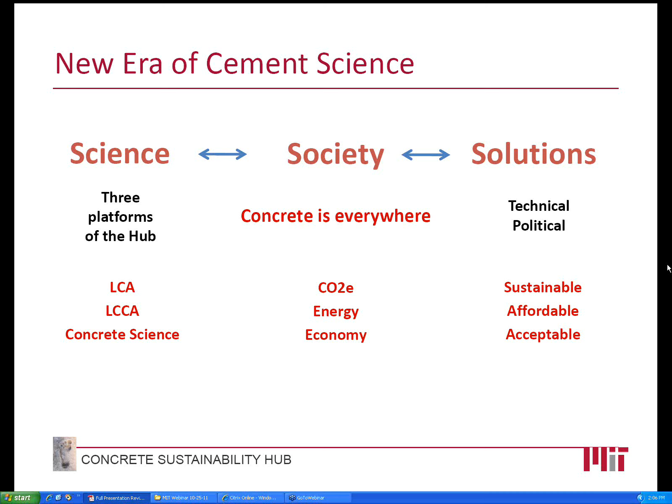We're well into the process of tying these things together, and the glue, to some extent, that's holding us all together is industry advisory committees, which are giving us increasingly sophisticated feedback on what we're doing and how the work that's being done at MIT can impact industry.

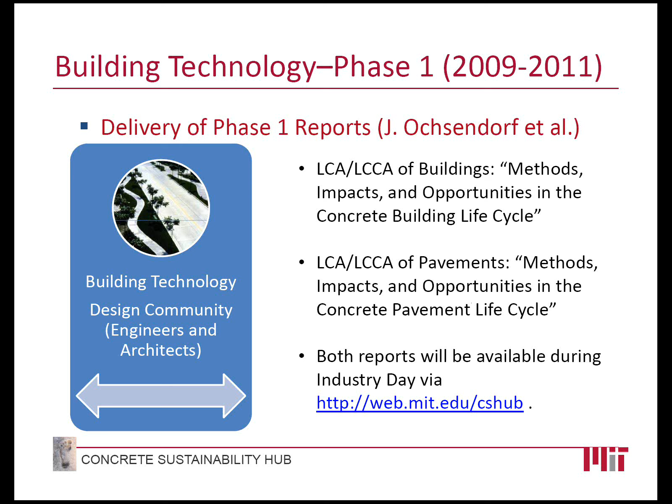So with the next slide, I'll just give you a couple of keynote bullet items of progress that's been made on the LCA side. There are a number of reports that are online, which you can peruse at your leisure. So with the next slide, I can show you a little bit on the LCA side. The title of this slide is really the important takeaway message. These are the most comprehensive models to date.

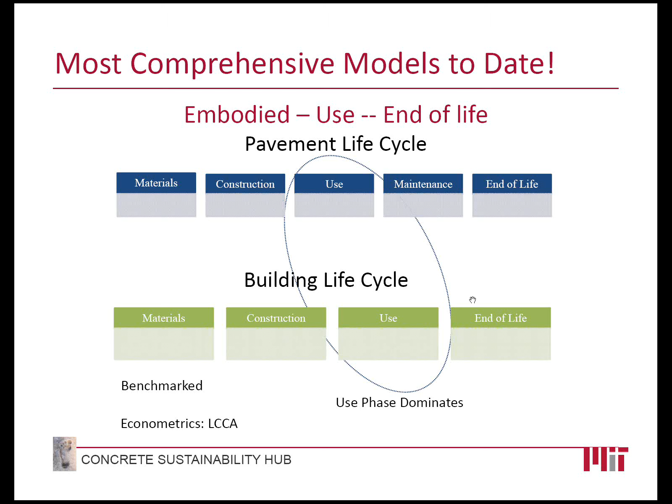By that, I mean, or John Ochsendorf means, that both the embodied energy and the use phase have been analyzed really very comprehensively. It's the combination of these two that throws really insightful perspective on the problem.

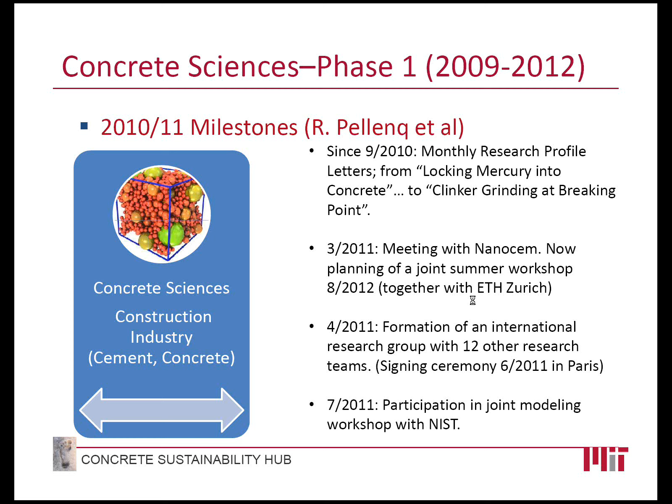The next slide shows some of the activities that have occurred within the hub. They are a really very impressive bunch of dates. I think that this is being recorded, so I'll let you look at this in some detail, but in the interest of getting through these in a reasonable length of time, we'll go to the next slide, which shows a timeline from the moment we started.

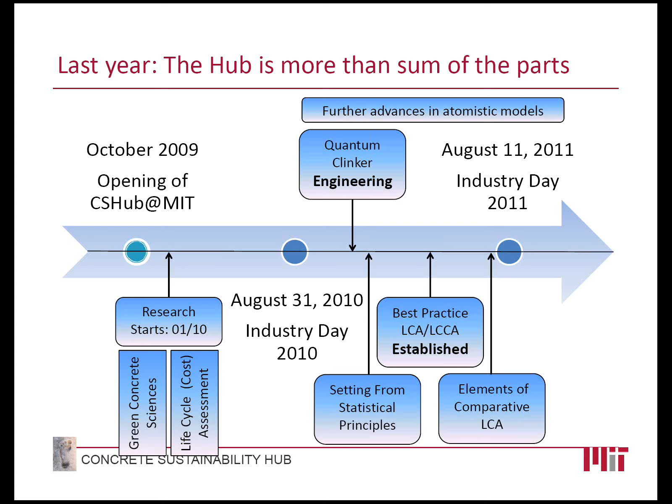You're going to hear some of the details of how this is going to be done in the coming talks. So the next couple of slides really bring this introduction to a close.

We feel that we're going to tackle the issues of the 21st century through modifying materials from where we are now to where we're going to be, and that's going to, in a holistic kind of way, bring us to a much more sustainable industry. So at the last, I think, 2 slides, I can show you a summary of where we are.

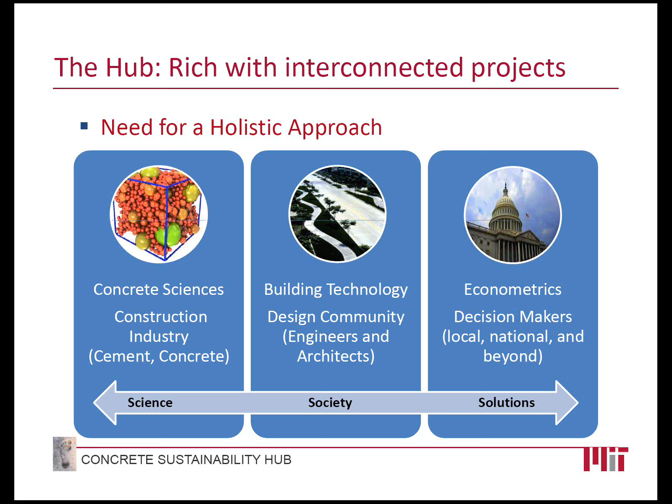We want to bind these, keep cognizant of society's needs, keep cognizant of industry's needs, which are not only being good citizens, but also keeping a good handle on the economics of any improvements that take place. And all of this is going to be generated from basic science.

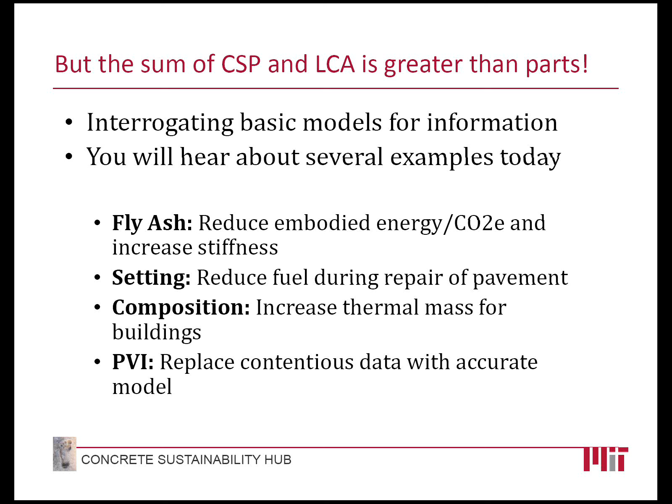And then finally, a little introduction, very briefly, of the talks that are about to happen. You're going to hear snippets. This is an abbreviated version of what occurred in August, but you're going to hear, I believe, snippets of how fly ash setting, composition, and pavement vehicle interaction are all important components of how we move this program forward. So that's the last slide.

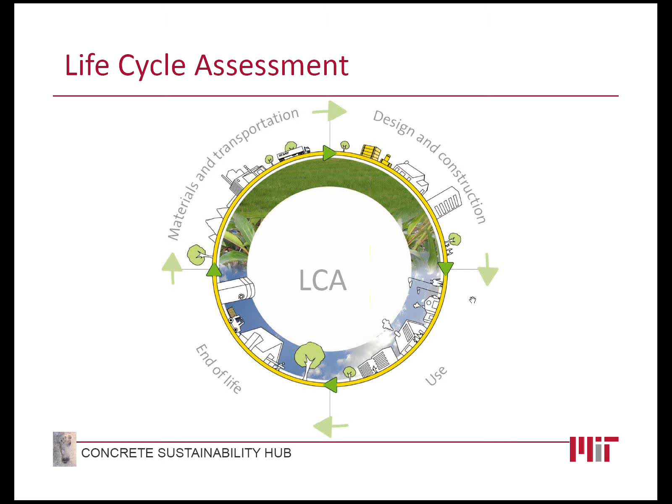The field of LCA is growing in importance as industry, governments, many different sectors of society are looking to quantify their carbon footprint. And so you find companies like Coca-Cola trying to understand what the carbon content of a can of Coke is. And what this is really valuable for is not only assessing current performance, but looking up and down the supply chain and looking at where the improvements can occur.

And one of the key findings of our work on concrete structures is that there are tremendous potential improvements up and down the supply chain for concrete structures, and particularly focusing on the use and performance. These are performing well now, but there's potential for improvement. And LCA helps us identify these areas.

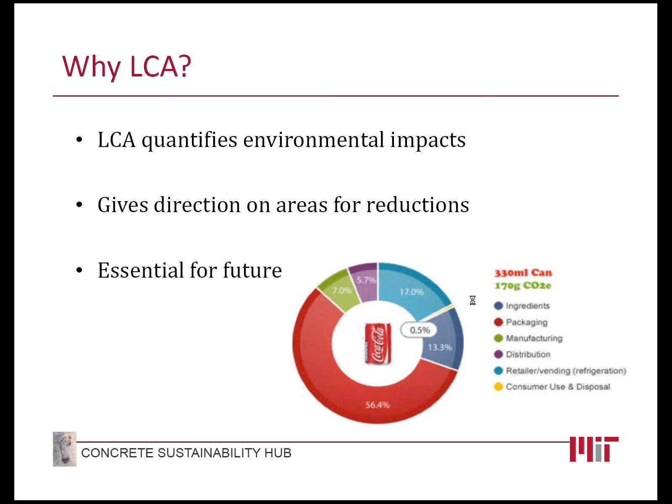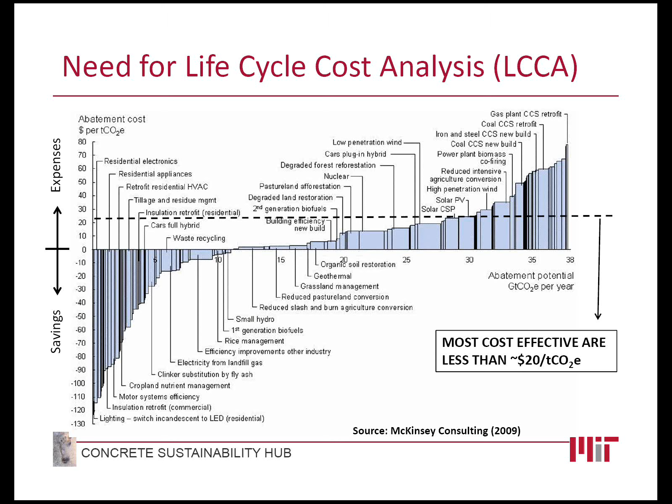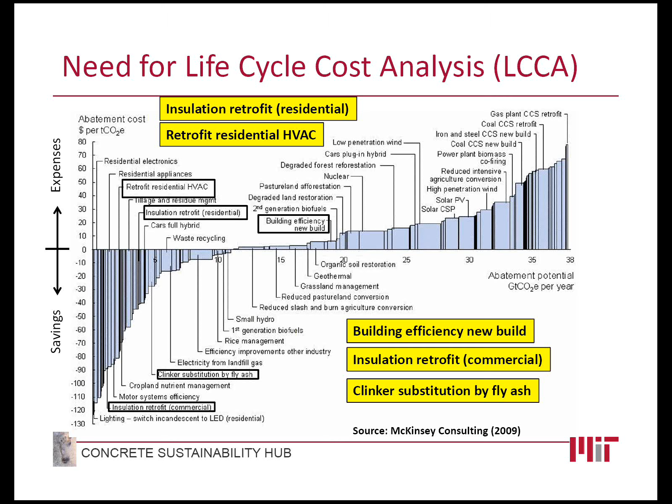Whereas in the built environment, there are a range of solutions that actually pay us money back. They save money for clients, for governments, while reducing emissions. And so our work is really focused on combining LCA with life cycle cost analysis to try to identify where the cost-effective improvements can be made. And this, for us, is really the important frontier in the next few decades in particular.

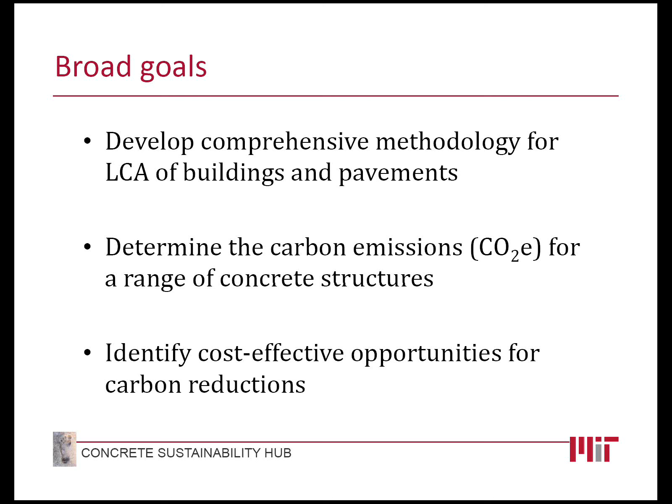So the broad goals of our LCA work in the hub at MIT are to develop comprehensive methodology for LCA of buildings and pavements, to determine the carbon emissions as measured by CO2 equivalents, also known as global warming potential, for a range of concrete structures. And we've identified cost-effective opportunities for carbon reductions. And this is really the first 2 years of work, which is now completed. We're building on that going forward. Next.

In the case of pavements, our system boundaries are comprehensive. We look at things including traffic delay and carbonation during the use phase, maintenance throughout the long life of a pavement. And we did a survey of other LCAs that are out there, and many of the current LCAs are missing very important components along the life cycle. Next.

So the objectives of our pavements work are to develop a comprehensive methodology for performing LCA for pavements, to quantify the greenhouse gas emissions using global warming potential for a range of roadway classifications and looking at all life cycle phases, and then identifying opportunities for reductions and cost effectiveness of those. Next.

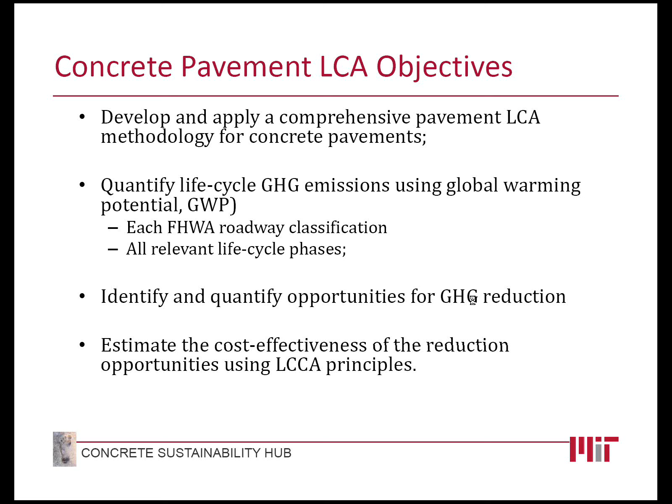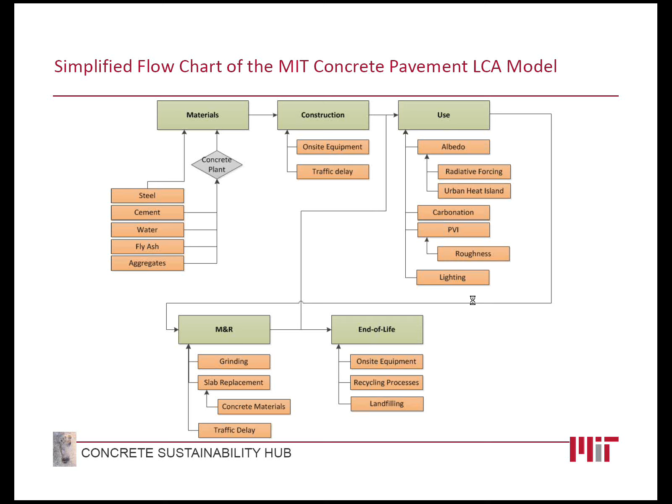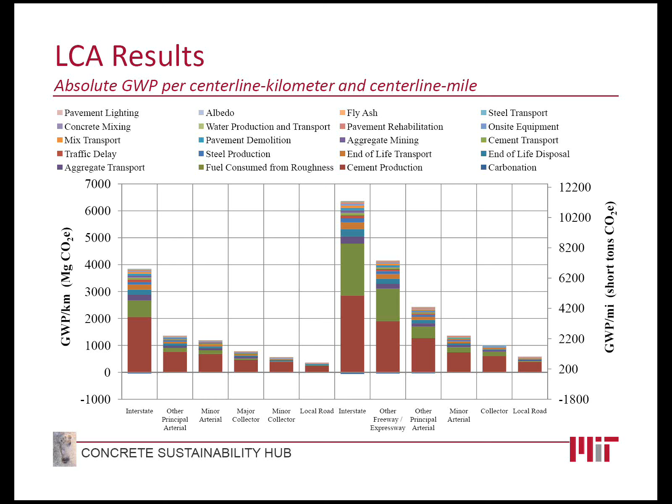Our results, this is for 12 different roadways, FHWA roadway classifications for interstate highways down to local roads, and these show the results per centerline kilometer and centerline mile. And this quantifies what the emissions are from different aspects of the life cycle and the relative impacts of larger roads versus smaller roads. Next.

And then we apply a range of different potential strategies for reducing carbon, including increased fly ash or adding an extra rehabilitation, optimizing end-of-life carbonation. And what we find is, for almost all pavements that we looked at, a suite of strategies could lead to carbon reductions on the order of 30 to 60%, which are quite substantial, and these are with existing technologies. Next.

And we particularly focused on the role that MEPDG can play, a mechanistic design guide which allows for more optimal pavements and prevents over-design. And compared to benchmark or baseline cases designed with AASHTO 93, MEPDG designs offered savings of carbon on the order of 10 to 20%. Next.

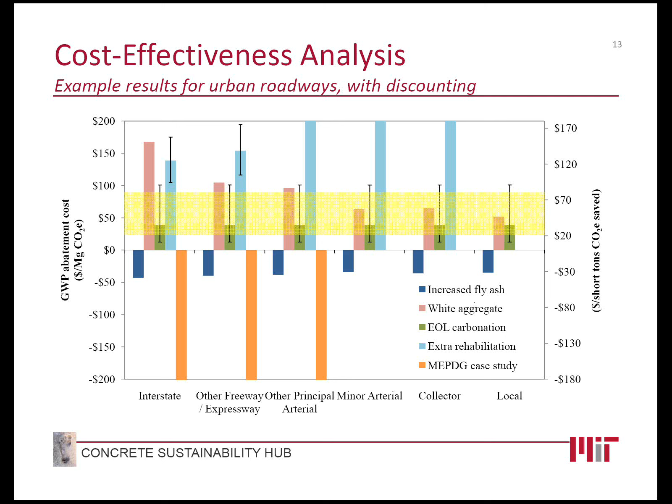And then when we compare the cost effectiveness of these different strategies, what we find is that this is similar to the McKinsey curve I showed. While there are a range of strategies for reducing carbon, there are two that jump out as the obvious winners, which both save money and save carbon. And those are increased use of supplementary cementitious materials such as fly ash in the example we looked at, and the MEPDG examples which prevent over-design are the single most cost-effective and carbon-effective strategies going forward. Next.

So on the pavement side, we've identified and described transparency requirements. We've established a robust methodology to carry forward comprehensive system boundaries. We quantified emissions, identified reduction strategies, and evaluated the cost effectiveness of those. And in general, we've created a methodology that others can build upon moving forward in terms of benchmarking the current performance and future opportunities in pavements. Next.

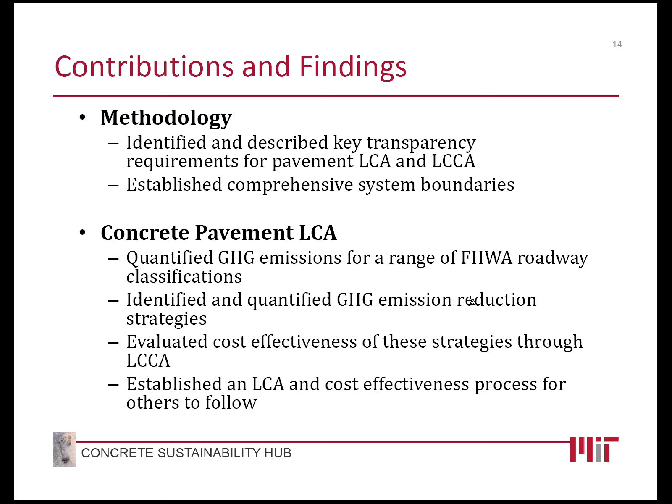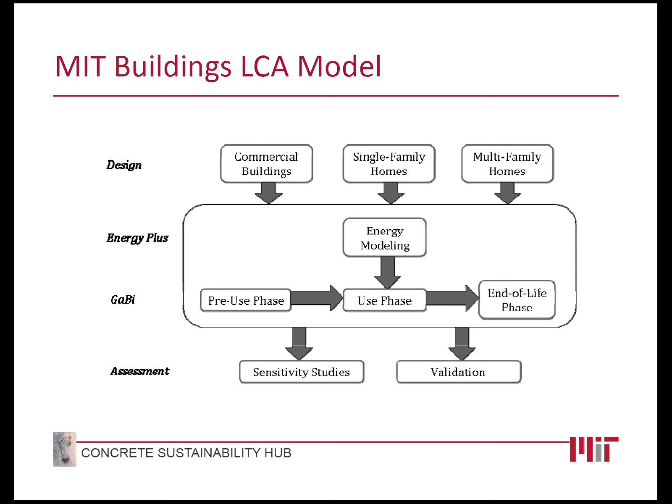I'll switch to buildings. We've done very comprehensive and extensive studies of a range of buildings, commercial, single-family homes, multifamily residential buildings. We carry out detailed energy models and look at the full life cycle performance of these buildings, and then validate those compared to other studies and look at sensitivity of the results. Next.

For the buildings, again, we're focusing on developing the methodology. We're looking at both embodied and operational phases. We're assuming a 60-year lifespan for the buildings, initial concrete mix with 10% fly ash, and then we've done a lot of work, of course, on developing the data that back up the LCAs, which is so crucial to the results, using both initial inputs from GaBi, the software we used from PE International, as well as supplementing that with our own research. Next.

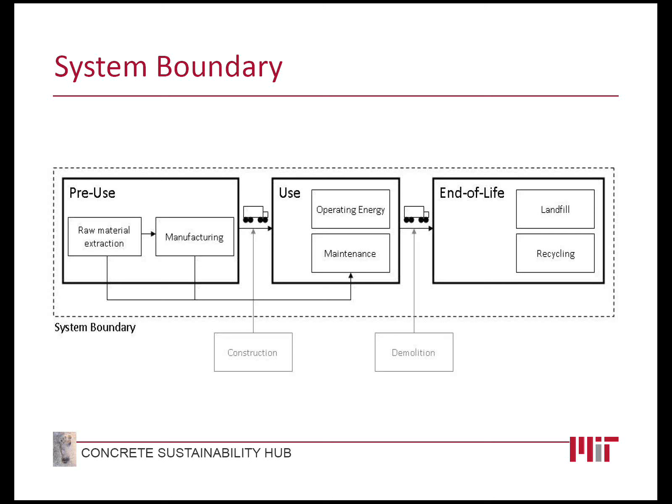Our system boundaries, again, go from extraction through operation, maintenance over the life cycle, and end of life. Next. And the buildings we consider are 2,400 square foot, two-story single-family homes in both insulated concrete form construction and light frame wood, as well as 4-story multifamily and 12-story large commercial buildings. Next.

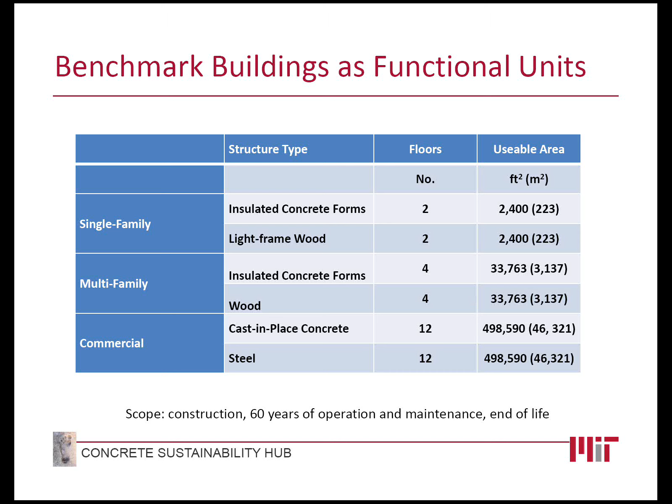These buildings are benchmark buildings that are published by the Department of Energy, so they give us standard energy and operating loads so that it makes the work more reproducible and more robust. This is the single-family construction, and we compare the climates of both Phoenix and Chicago for all the buildings considered. Next. I should say our LCA work is focusing on North America.

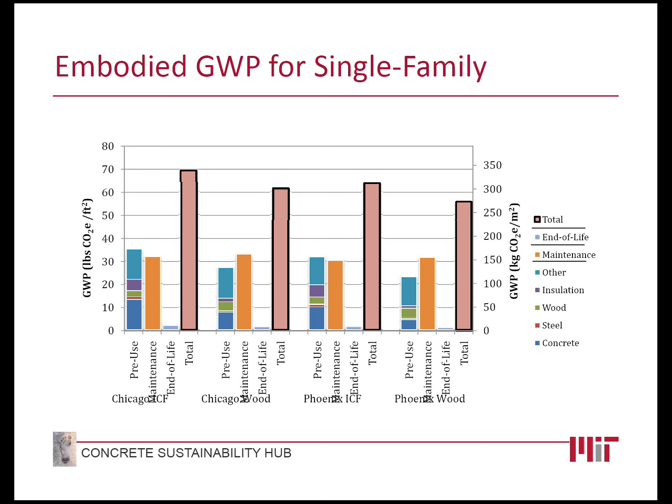These are examples of results for single-family homes in terms of embodied energy. The ICF has slightly higher initial embodied, this is expressed as embodied carbon, global warming potential, whereas the wood buildings have slightly lower initially. Next.

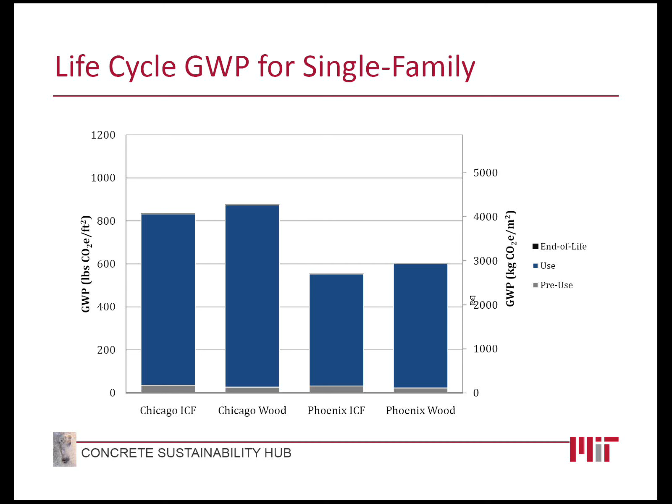And when we look at the overall emissions over the life cycle due to a number of different performance features of ICF homes, we find lower annual operating energy and therefore over a 60-year lifetime lower carbon emissions than the wood. In other words, the operating emissions overcome the initially higher embodied emissions over 60 years. Next.

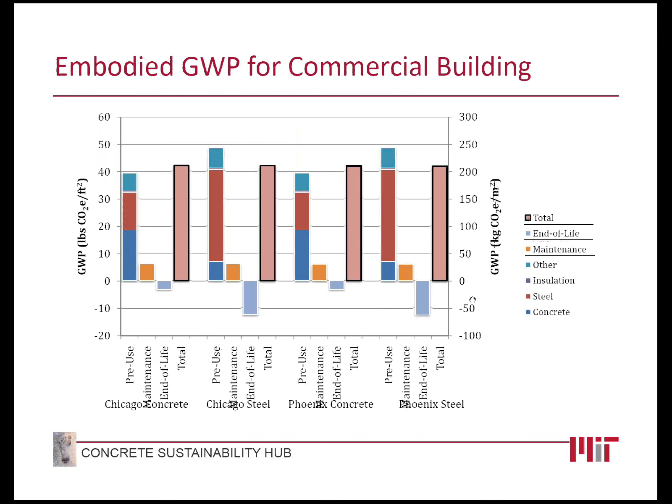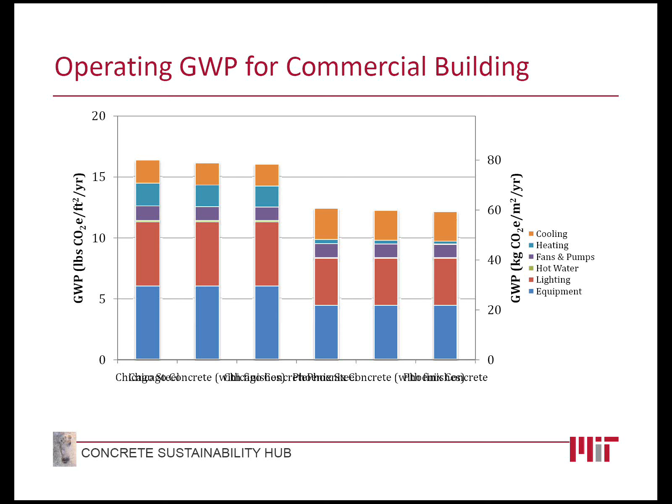That's for single family. I'll now move towards commercial office buildings, and here we compare steel and concrete, next, in 12 stories, and the embodied emissions are found to be quite similar. Next slide, we find operating benefits due to higher thermal mass in the concrete building, which gives some benefits over time in terms of operating energy. Next.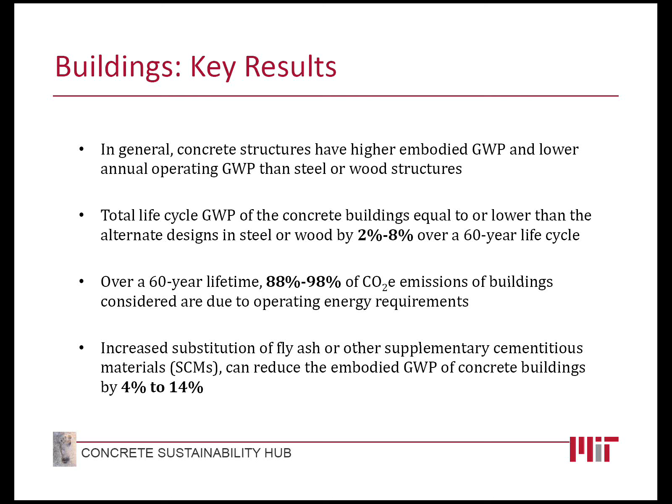and this really opened up an exciting new potential of cross-fertilization with concrete science in terms of asking what are ways we can improve the thermal performance of concrete over time, and that can dramatically improve the life cycle carbon performance of buildings, and that's a key area to focus on in the future. And also we looked at potential reductions in carbon possible through fly ash substitution and other technologies. Next.

So in general, over the last 2 years, we've developed comprehensive methodology for both buildings and pavements. We've emphasized transparency and repeatability. We've benchmarked the emissions for a range of concrete structures and begun to identify what are the opportunities that are cost-effective and also deliver carbon reductions in the future, which we think is so crucial for infrastructure moving forward in this lens of both cost and environmental impact. And until now, we focus primarily on carbon performance, but there are other aspects that are important as well. So our reports are now available online, and with that, I will close.

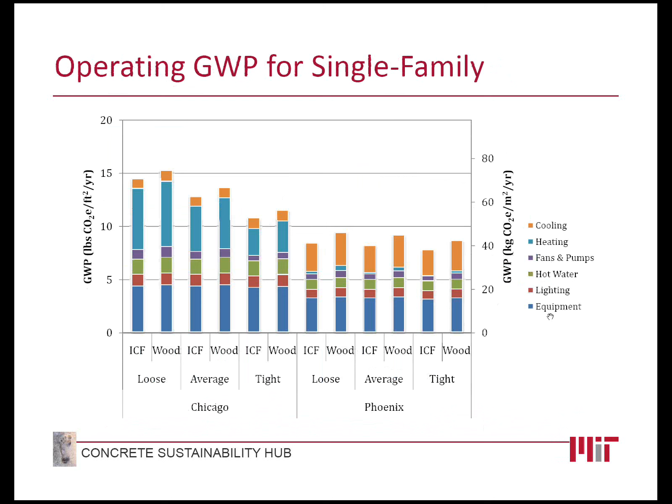One or two more slides. Yes, Chicago has a basement as shown in the section, and Phoenix does not, based on standard construction practices in each of those two locations. The carbon footprinting takes that into account in terms of square footage and material quantities used.

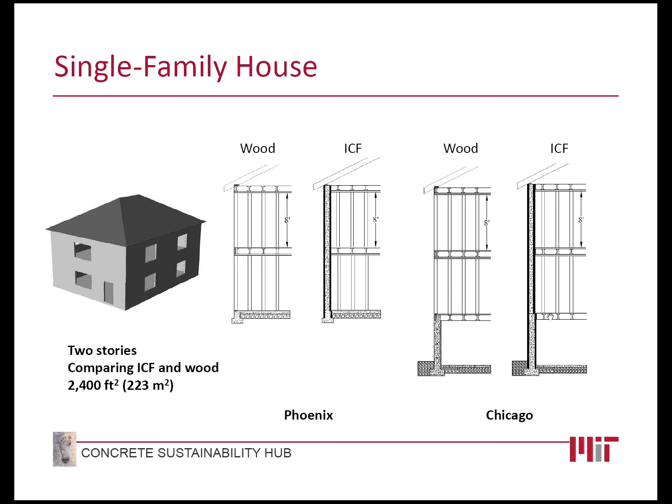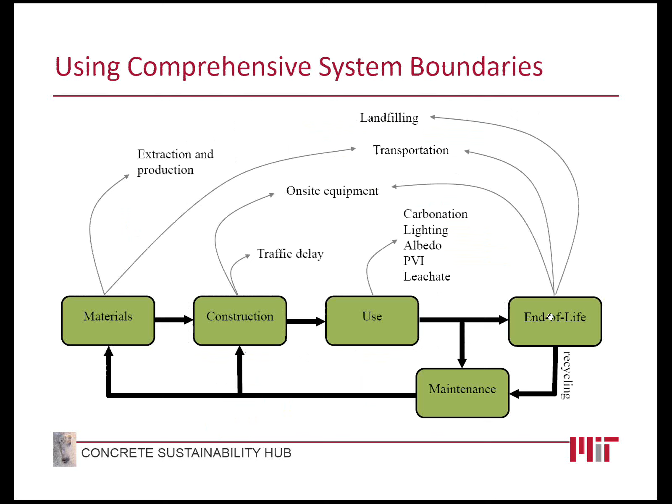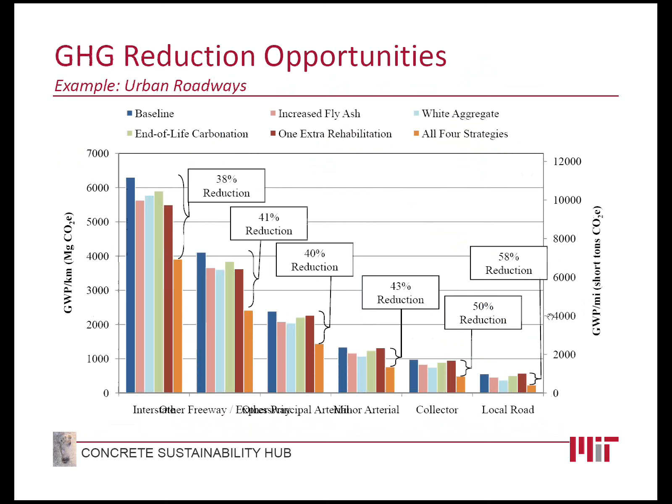The next question is, did you also work with other cement replacement materials such as granulated blast furnace slag? A very good question. In the broad category of SCMs, supplementary cementitious materials, we focused on fly ash as the primary means of doing it, but acknowledge there are many other effective and available technologies such as slag and others. As of now, our reports have not focused on anything beyond fly ash, but there certainly are a suite of other technologies, and it's an example of how the work can be expanded going forward.

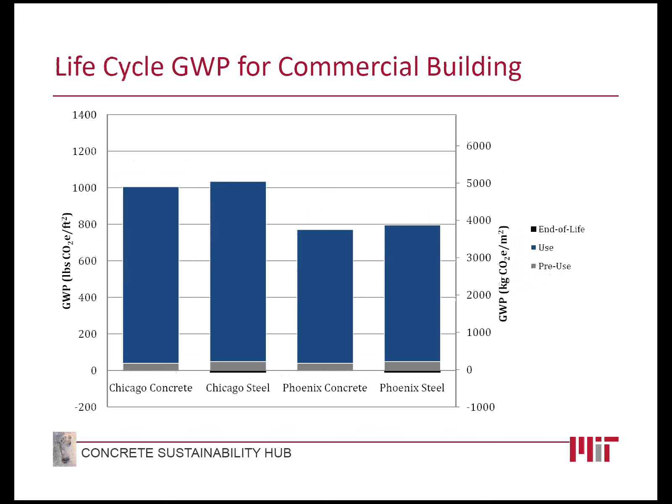The next question: what default material properties were employed in the comparison of MEPDG and AASHTO design emissions? Those are presented in the appendix of our reports in great detail, both in terms of mix designs and cement quantities per cubic yard and things like that. So I would refer the questioner to the reports, which are published on our webpage at the Concrete Sustainability Hub at MIT.

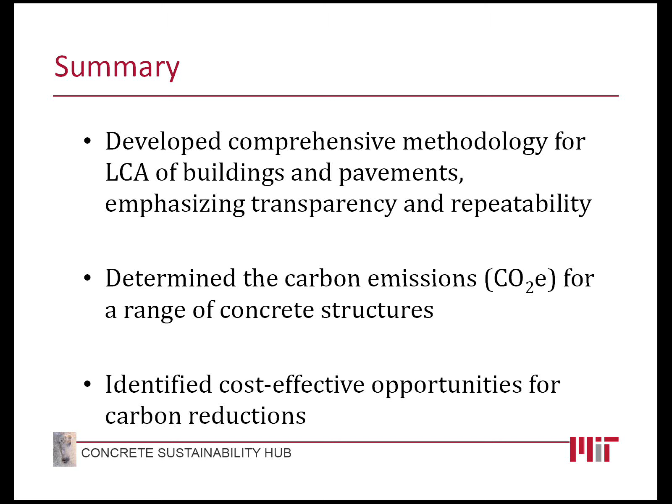Okay, yeah. So good evening, everyone. I'm Roland, phoning in from Paris, France, where I'm actually spending the week. So I'll be presenting the science part of the research we do in the CSHub at MIT.

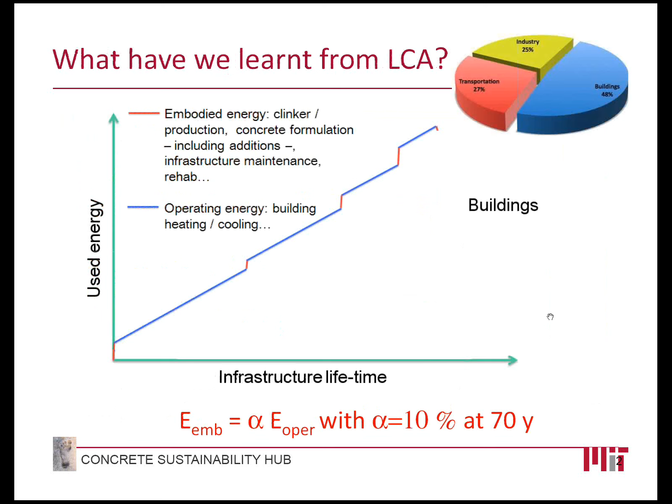The first slide shows the cost in terms of energy as a function of the lifetime of a building, for instance. This is an increasing function with blue sections and little kinks in red. The blue part is the operating energy, which is the heating and cooling, while the red part of the curve, especially the one at time zero, at the origin of time, is the embodied energy, which is the clinker production, the concrete formulation. That includes everything, actually. And also for the little kinks in red further up in time, that is the infrastructure maintenance and rehab. So if you sum up all those red parts and divide by the blue, you see that the embodied energy is actually a very tiny part of the operational energy. In the US, it's about 10% over the lifetime of a building. Next, please.

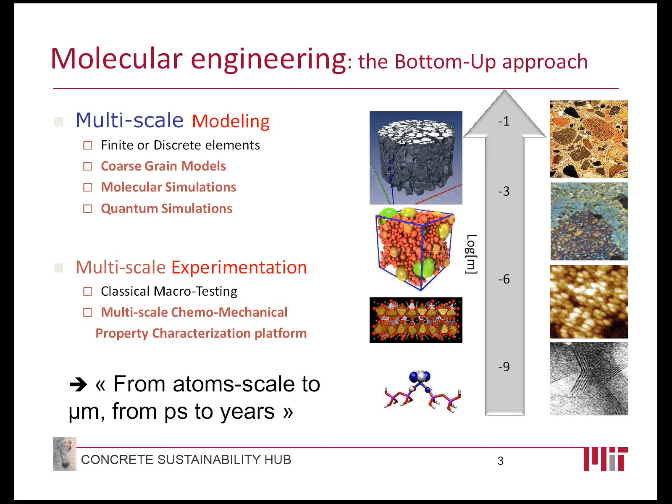So this is our strategy, our philosophy at MIT of tackling the problem of concrete and the different phases involved, from the clinker to the set paste. What we do is what we call the bottom-up approach, both from experiment and modeling. In both cases, we want this bottom-up approach, which starts in terms of modeling from electrons, then we go to atoms, and then at the end we go to modeling grains, and we want to connect with finite elements, those engineering methods that are already at work. On the experimental side, we want to test cement from the very small scale, mechanical testing like nano-indentation, nano-scratching, for instance, and connect to macro properties. So our philosophy is basically from atoms to microns, from picoseconds to years, because this bottom-up approach is also in time. Next, please.

Hello, next. Okay, so this is actually the menu that we had the other day with the researchers, and I will give three examples. The first deals with the molecular engineering of clinkers, and the idea is obviously to reduce the energy of production related to those clinker phases. One challenge, for instance: can we switch to belite instead of alite? That obviously addresses the embodied energy. In terms of the chemistry behind it, it has to do with dissolution rates and grinding. As you will see, the research we did at MIT on reactivity has to do with electrons. We need to know where the electrons are around those atoms in alite or in belite. We see that grinding, at the end of the day, comes down to breaking bonds in those crystals. Next, please.

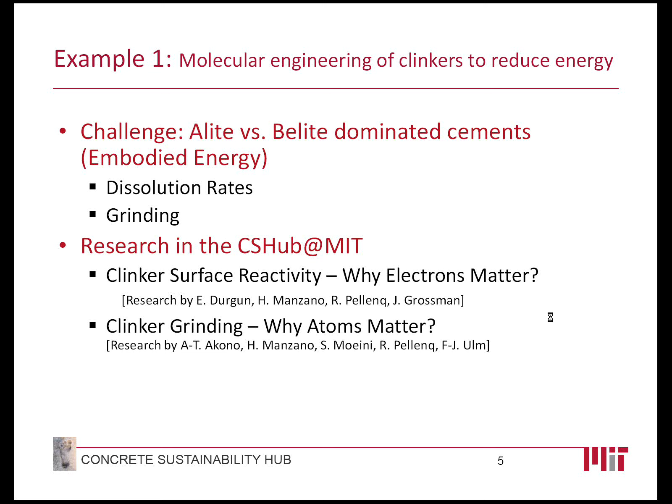As you all know, alite and belite are both calcium silicate crystals. As you can see on the right, you have a snapshot of C3S here. Those crystals are made in the kiln at quite different temperatures: high temperature for alite and low temperature for belite. We also know that the reaction with water is fast in the case of alite and slow in the case of belite. We want to know why, and we want to see if we can tune those properties, maybe to one day switch to belite.

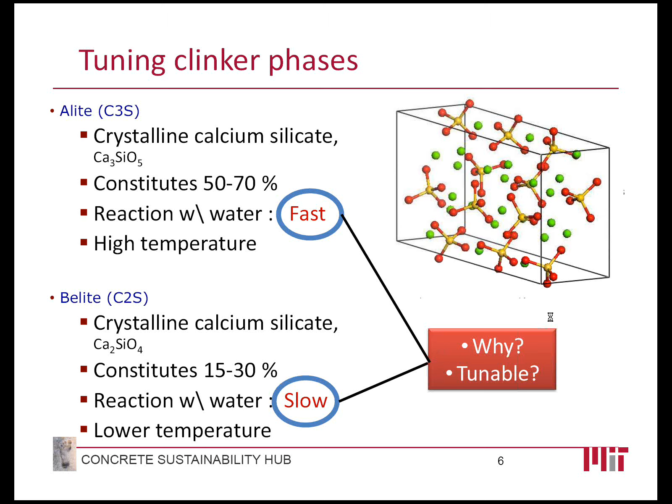This is a molecular simulation of the dissolution of alite, and at the bottom of this plot on the left you can see water molecules coming close to the surface of alite. We found out that the first water molecule that comes close to the surface actually dissociates, and we have a proton penetration inside the structure. This is a hopping diffusion mechanism known as a Grotthuss-like mechanism.

What is very important is that this is not the case for belite. So there is an intrinsic dissolution rate difference between alite and belite, which obviously relates to the actual pristine original nature of those crystals. The second consequence is that if we want to accelerate belite dissolution, we need to modify belite, for instance by considering impurities in the crystal.

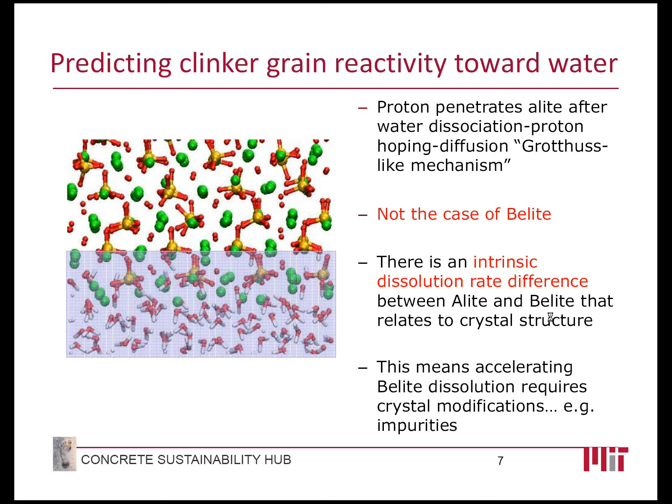This is the actual measurement. Because we are not only doing simulation or calculations, we are also developing experimental methods. This is a new method called nano-scratching, a way to probe a very important property of those crystals, which is the fracture toughness, and that obviously relates to grinding at the end of the day.

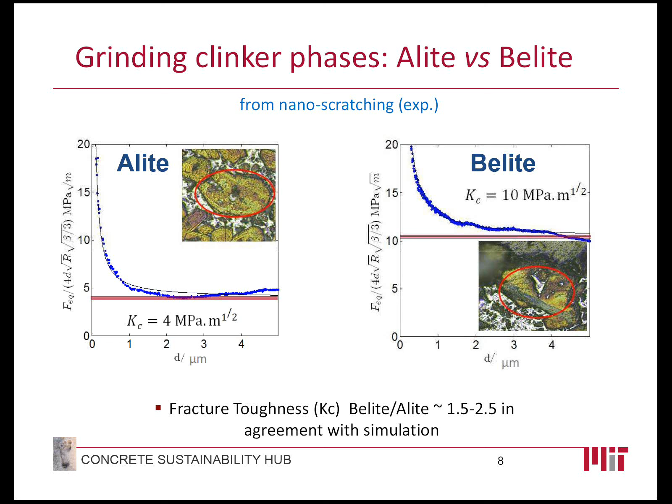You can see that the value given for alite is about 4 in those units of megapascal square root of meter, while for belite it's about 10. So the ratio of belite over alite for the fracture toughness property is roughly around 2, which is in agreement with simulation, telling you that belite is actually tougher than alite and more difficult to grind.

If we now convert those fracture toughnesses, Kc, we square it and divide by E, the Young's modulus, and we end up with a value for the fracture energy. Now let's say we take a plane of a specific surface area, so we multiply this fracture energy G by that specific surface area, and we end up with how much grinding energy is spent per meter squared per mass of clinker.

On the plot on the right-hand side, you can see our values in those two lines in green. The upper one is for C2S, the lower one is for C3S, and in between the data you see are experimental values. So we are really pretty much in the ballpark of the experimental values, comparing simulation and experiment. In this case, although we're not predicting the bend of the curve, we can clearly make some prediction about the grinding energy required to grind a given plane.

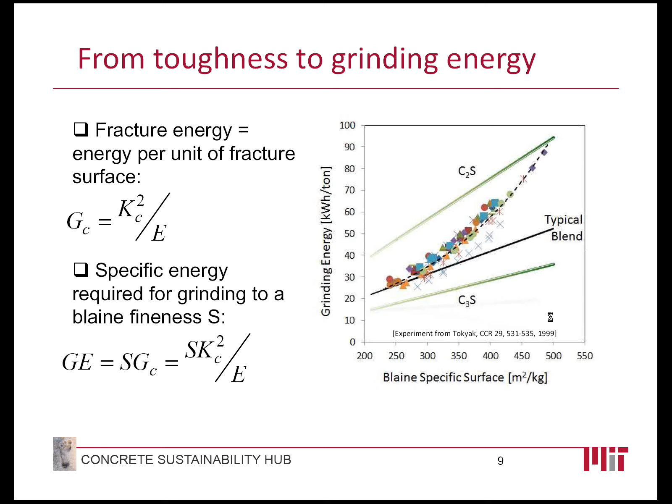If we go for a back-of-the-envelope calculation, as I told you, if we want to switch from alite to belite, we may have an energy reduction of roughly 250 to 360 kJ per kilogram. But as I said, if we are now grinding belite, then the energy required to grind belite is larger. So we end up with a net grinding energy in between 180 to 360 kilojoules per kilogram. So you see, it's pretty much a wash.

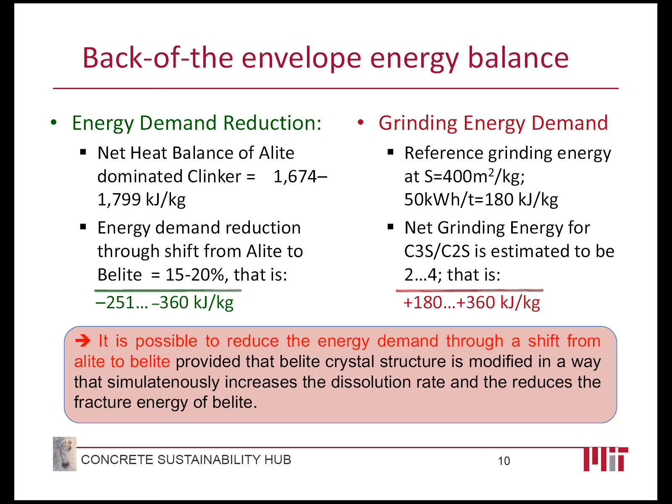What you gain on one side, you lose on the other side. So yes, it is possible to reduce the energy demand through a shift from alite to belite, provided that we actually do something to the belite crystal, for instance by including impurities, with the idea of increasing the dissolution rate and also reducing the fracture toughness or fracture energy of belite.

Okay, my second example is about setting and hardening. So what we want to understand is what is setting, not only in terms of microtexture, but also related to how to predict the evolution of mechanical properties with time.

In a very practical world, if we consider roadworks, that will decrease setting time to reduce or avoid traffic delays. So it's a very practical issue.

For the research we do in the hub, we have developed what we call statistical mechanics of grains or colloids in the case of cement, so that we can predict the evolution of mechanical properties with time. We now have in place a very general method that allows understanding setting.

From the ground of statistical physics, or very fundamental physics, we can actually modify temperature or interaction effects like surfactant effects and so on. Next.

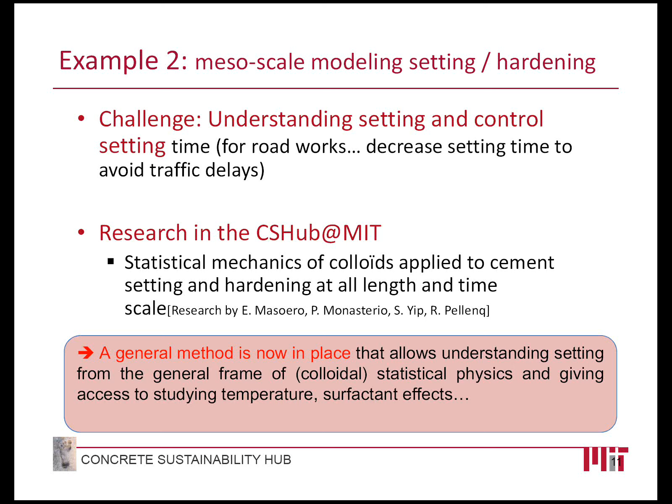So this is the model. Basically what we find out is from atoms upscale, we first design grains at the scale of nanos. We have good experimental reasons to know that the grains are on the scale of a few nanometers.

What we do is simulate the precipitation of those CSH grains on the left in between the clinker phases.

So that's the little cartoon on the right, and you see those black dots that are clinker grains in between clinker phases. So we do this nano-granular model of CSH precipitation, and that relies again on statistical physics.

Which for us is called grand canonical Monte Carlo, based on knowing the grain-grain interaction, so the CSH grain interaction between two of them, or the clinker-CSH interaction, for instance.

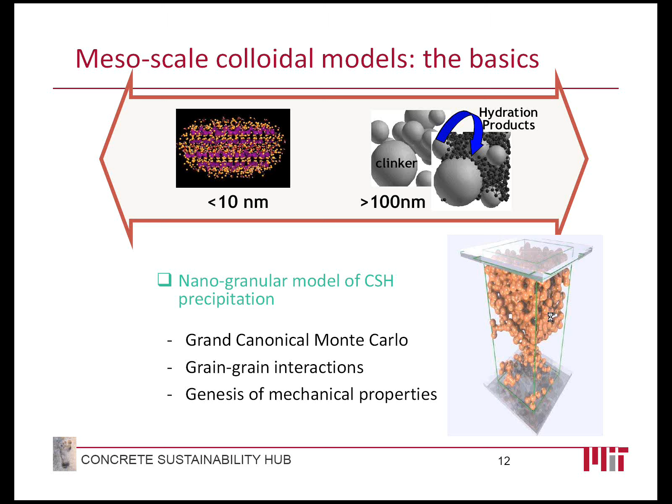And that gives us a way to predict the mechanical properties as setting occurs.

Next is the illustration of this. We have an assembly of grains in those boxes with some polydispersity in terms of grain size. For instance, what's called poly10 is where you have a large dispersity of sizes.

A large distribution of possible sizes of CSH grain. That model allows us to predict the mechanical properties, which is the first top plot, the elastic property of cement as a function of the packing fraction.

The green, yellow and gray data points are our simulations, and the small blue dots are the experiment as measured in the lab by experimental people using nano indentation.

At the same time, we can use on top of this grain-grain interaction description transition state theory, which allows us to predict the evolution of mechanical properties, here the shear modulus as a function of time. This is the type of measurement of the simulation we can do.

You see that we have two red lines for our model, and the experiment is in black. The difference between the two simulation curves is linked with how strong the interaction is between the grains.

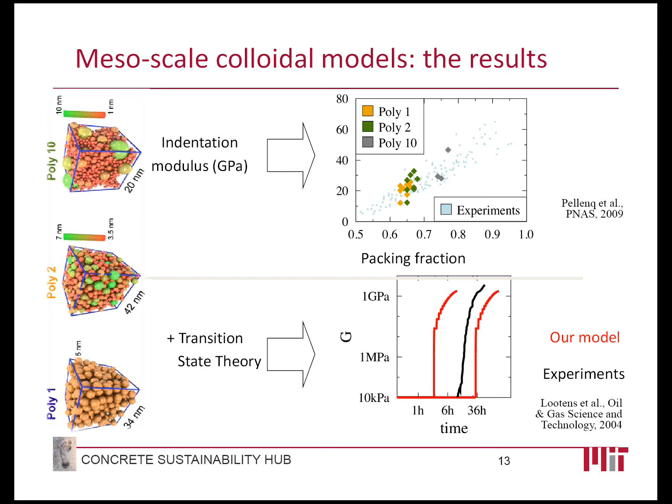Okay, so now my last example is about the glue phase of cement, the CSH phase. The first question is what is CSH actually, is it a collection of grains as I told you, or where are the grains?

Once we know more about the CSH, we want to know properties like thermal mass, which addresses the operational energy, and we want to see how much aluminum we can dock in the CSH in the context of using slags and fly ashes.

And that obviously addresses the embodied energy from my first graph dealing with buildings energy consumption.

So our research will show you some new pictures of what CSH is at different scales, and see where are the grains. Then we go through heat capacities and some aluminum substitution in CSH.

Our result is that yes, we do confirm the granular nature of CSH. We recommend a large use of aluminum addition because we found that that may improve mechanical properties.

And we found a link between the water content in the final CSH phase and the heat capacity of the set paste. Next.

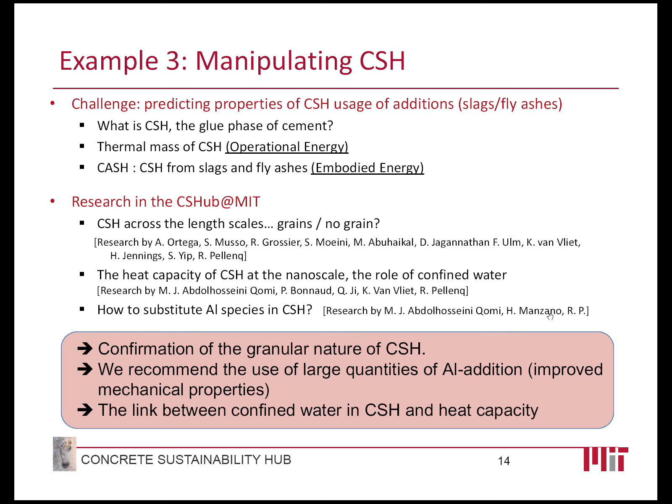Okay, these are three micrographs views of CSH at different scales. The first plot on the left is at the scale of 10 microns. You can see CSH looks like a collection of cauliflowers stuck together.

If we zoom on one of those little blobs, you can see that this blob is made also of little grains. And now we're at the scale of 100 nanometers, this is the middle picture.

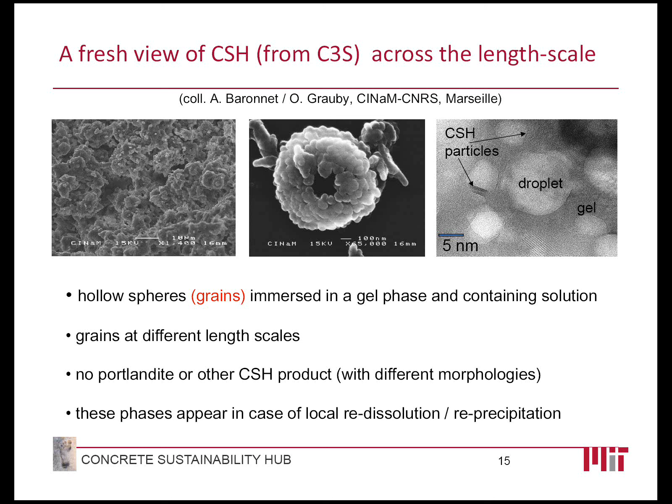If we move to the right to the scale of a few nanometers, so we go from microns to nanometer scale, we found out that one of those grains in the middle plot is actually made of little CSH particles that have locally some layered texture - that's what we call CSH nanoparticles. So there are grains at different scales. At very early age, we didn't find any Portlandite crystals or other CSH phases. So these are very multi-scale grains. CSH is very multi-scale and very granular.

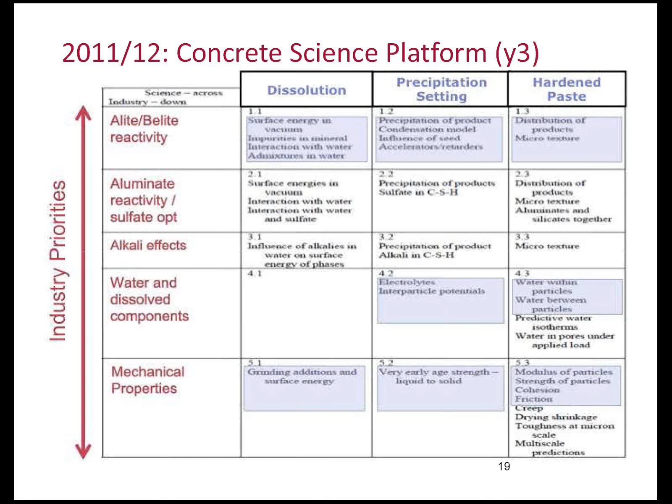And I think this is my last slide. Thank you. Okay, we do have some questions.

All right, the first is, and I apologize for the feedback, for manipulating CSH examples, what form is the aluminum? Okay, we found out that there are two ways to accommodate aluminum in CSH. The first is very general, common to any stones or minerals in nature, which is substituting silicon sites. But that is not giving you a lot of aluminum, maybe 10, 15%. The idea is that we are reproducing the solid-state NMR data available in the literature if we consider calcium substitution.

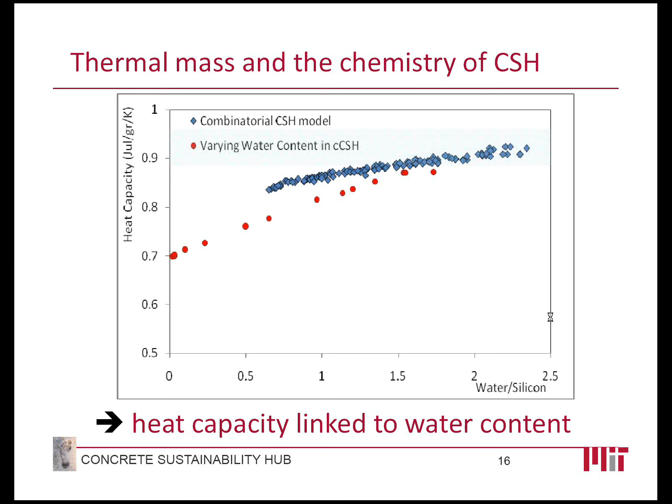Okay, there's a follow-up question with respect to what SCMs contain high aluminum? SCM. So aluminum, I guess, next slide. Okay. I don't get the question. STM? What is STM? Supplementary cementitious materials. Oh, okay.

I mean, the idea is that if we are to improve the mechanical properties of cement, we need to substitute the calcium side, and to do so, we need to first substitute the silicon side. So it means that we go first for the silicon and then the calcium. This is why we need to actually consider a lot of substitutions of aluminum in the structure. So the idea is to put a lot of aluminum rather than a few.

Okay, and then another question: what are the implications of fly ash classes, particularly Class C and F? Yeah, I think the implication, for us, the fly ashes per se, we need to basically extend our reactivity study that we did for belite and alite towards this class of materials, those fly ashes, right? Because I know that one class is more reactive than the other one, reactive in terms of being able to react with water, for instance.

And clearly, this is not understood yet, and we are starting this research now. We have a new postdoc coming in the hub to actually tackle this reactivity, surface reactivity of fly ashes, for instance.

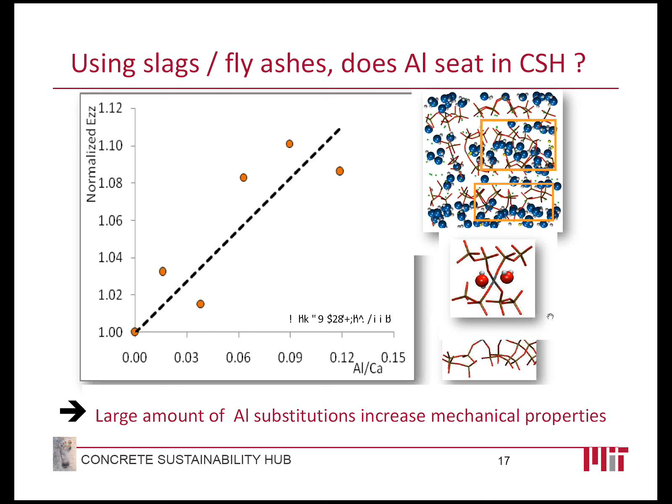Okay, that's the rest of the questions. Thank you very much. Okay, pleasure. Okay. Kristen, you are now unmuted. Okay, great. We will be able to connect. Yes, we can hear you. Okay, I'll just pick up my speakerphone.

Okay, so thank you, and I want to echo the previous comments, appreciating the time that you guys have spent hearing more about what we're doing and allowing us to receive your input. So what I'll be doing is wrapping up the discussion we've had so far and figuring out how we can move forward together. And we chose 2030 as a target date for some reasons that may seem obvious to you on the architectural side, but also as a 20-year out goal for ideas and projects that will span and move the industry forward over a foreseeable research lifetime.

So I'll be presenting to you a couple of areas. What we're going to cover in this last presentation, I thought it was best for us to take a step back and say, where were we when the hub first started? Where are we now, as of that industry day in August? And then where are we going by 2030? You've heard hints of these ideas on the LCA side and on the CSH side, but thinking forward even more. So in August 2009, let's keep in mind that there was no hub. It didn't exist at that time.

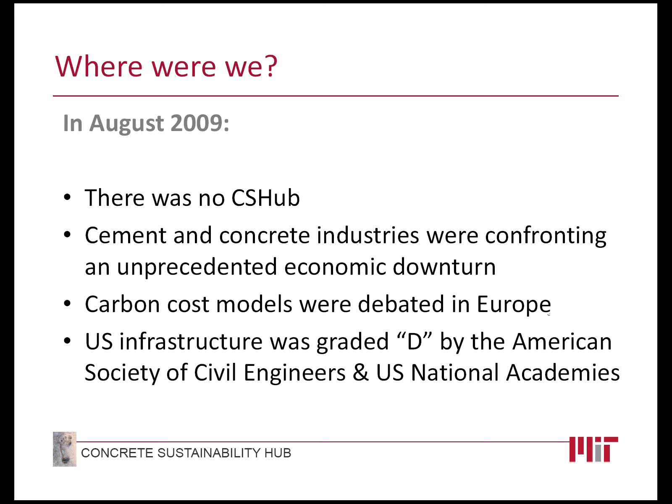It was a conversation that we were having among folks in industry, folks in government, and folks at MIT. And at that time, the industries were confronting a lot of pressures on the economy to find new approaches and deal with the same economic difficulties that academia was dealing with. And the carbon cost models were being hotly debated in Europe and affecting a lot of those decisions. On the U.S. side, our physical infrastructure was being given dismal ratings by our own civil engineers and the National Academy. So there were a lot of opportunities, but there were also a lot of risks.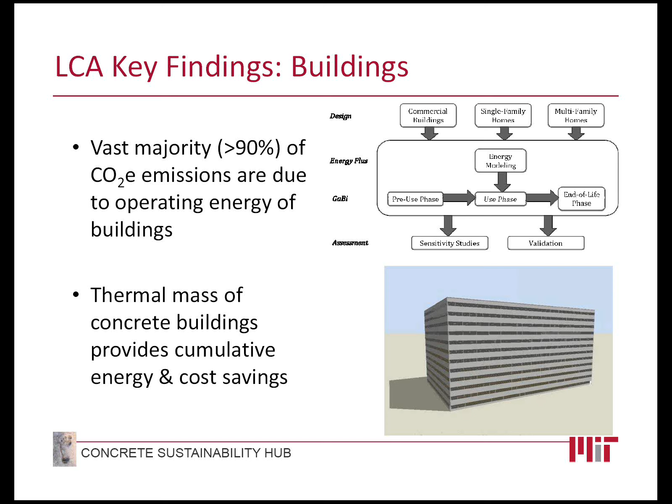So if we think about now what we've learned in buildings, that's one approach, but the LCA has also looked at the concrete pavements. There, the key accomplishments, as we see them, were establishing the first benchmarks for typical structures so that we could compare and contrast an interstate from a local roadway, see the ways that they were the same in terms of how choices in concrete supply and processing made a difference, and also see the way that they were in sharp contrast.

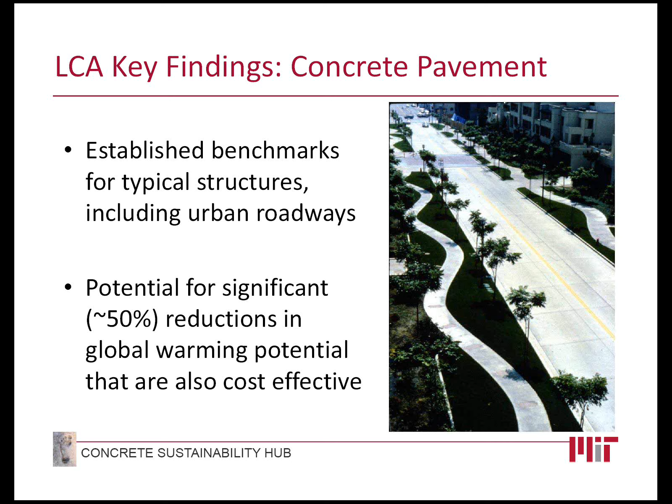Importantly, we've also identified the potential for significant reductions in the global warming potential. And these aren't reductions that are based on a whole new market model or a whole new set of materials. These are actually rather incremental changes that the industry could implement now that could offer cost-effective but also very significant reductions in greenhouse gas emissions and global warming.

So one of these accomplishments and contributions from the LCA side is to actually help us to articulate to the wider community, not just within the industry, but to the larger public, what the cost, the energy cost of structures such as buildings is.

And for example, in a car, we know we established the miles per gallon as a measure of fuel efficiency, and now we know for the buildings the best way to articulate that and compare choices is this global warming potential, or GWP. So this is really the energy cost, just like the fuel efficiency of your car. And you can see this compared here in the context of the roadways.

For example, you can see that the highest cost is for building interstates. Among the lowest cost is local roads. But more importantly, you can see how much of this comes from the cement production, how much of this comes from the traffic delay, how much of this comes from the mining of aggregates.

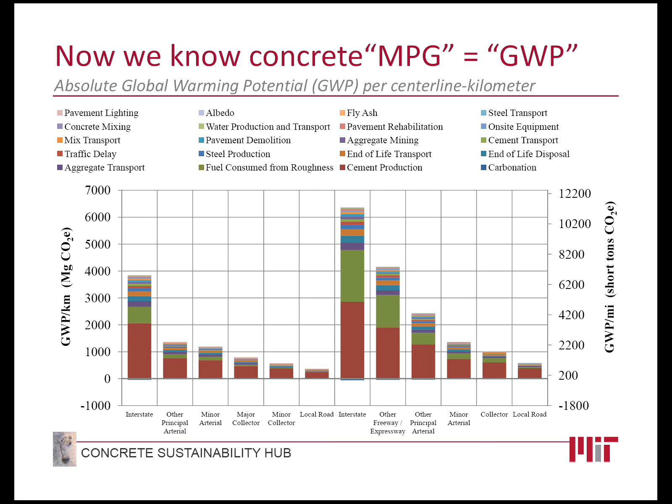So you can make choices on how to bring down this GWP, or this environmental cost of building roadways, because the information now is not just validated and the methodology is not just transparent, but it's also connected to the science.

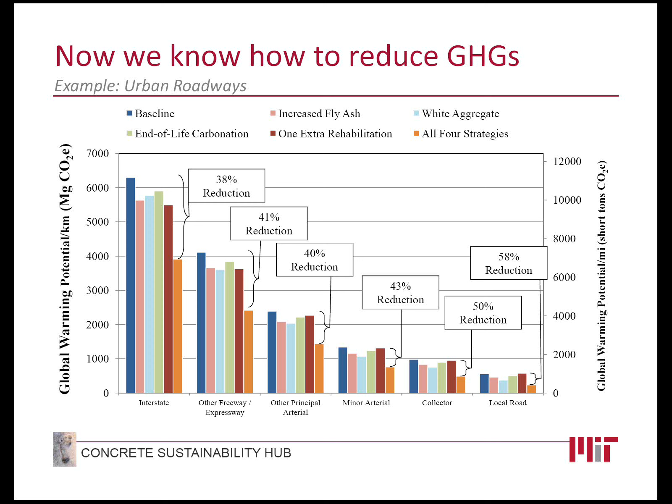And what's exciting is that these choices are real and these choices are well within reach of the industry to implement, but they can offer a plausible and very credible, approximately up to 60% reduction in the energy burden of creating, for example, a local road. And it's not really in our purview to actually implement combinations of these strategies, but it's that rigorous analysis where you can go back and make your own choices of how to move the industry forward based on these data being validated and transparent in the way that they have been. Okay, so next slide.

On the CSP side, so our concrete science platform side, there are several key findings. I just wanted to highlight a couple that I think are most intuitive. So starting with the very beginning of creating cement, paste, and concrete, we've thought quite a bit about clinker reactivity. For example, those of you who work on this side of the house know that there's a gross difference in the reactivity and the dissolution and the precipitation and the kinetics of forming cement paste using clinker that is rich in alite versus belite. And these are different crystal structures.

Through the atomistic models, we now understand why, not just that they differ, which has been empirically known for a long time, but why, and then how we can modify that by introducing substitutional elements into the clinker, which is already done in practice, but not with any quantitative understanding as to why, and really make rigorous predictions of this, and then in partnership with the LCA side of our hub, be able to say, well, is that worth it? If we were able to make and engineer a new clinker, will that bring down the GWP of the roadway in a way that we can argue is a substantial advance? So this gives quantitative tools to guide your decision making.

On the clinker grinding side, which is also a very energy-intensive part of the process, you can see that we've come, oops, sorry, we're still on that slide. You can see that that is something that is empirically known, that it takes a lot of energy to grind a clinker, but now we actually have a way to measure that experimentally and then see, well, how do substitutional changes in the clinker that might make it reactive make it easier or less easy to actually then achieve the grinding step. So there'll be energetic trade-offs, and we're now in a position to not just predict them through computation, but validate them through experiments that have been developed specifically within the hub. Okay, so next slide.

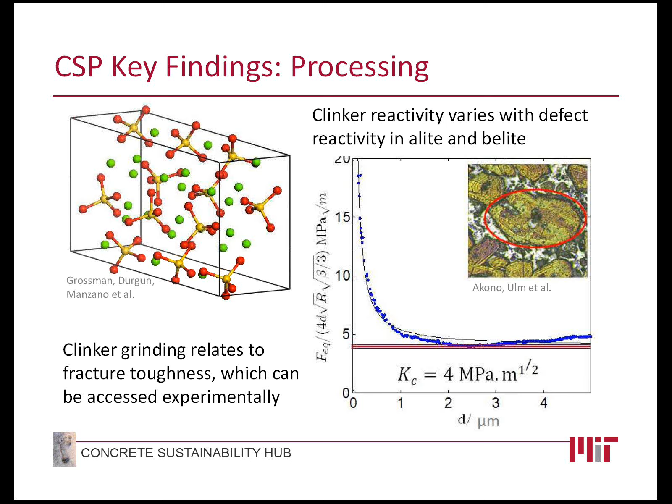Moving from the processing onto the properties. We're concerned with various levels of properties, and Professor Pellenq gave you a nice overview of that. One of the areas that we're interested in is understanding how to predict the precipitation of that CSH, or calcium silicate hydrate phase, because that's one of the most difficult aspects of cement paste formation and the resulting concrete product to predict. So we're actually developing new ways to understand and predict precipitation at the atomistic scale, and then we're going to form hypotheses. We've actually begun to form quite a few hypotheses in terms of how is this affected by the calcium to silicon ratio, how is this affected by pH, by temperature, by choice of clinker.

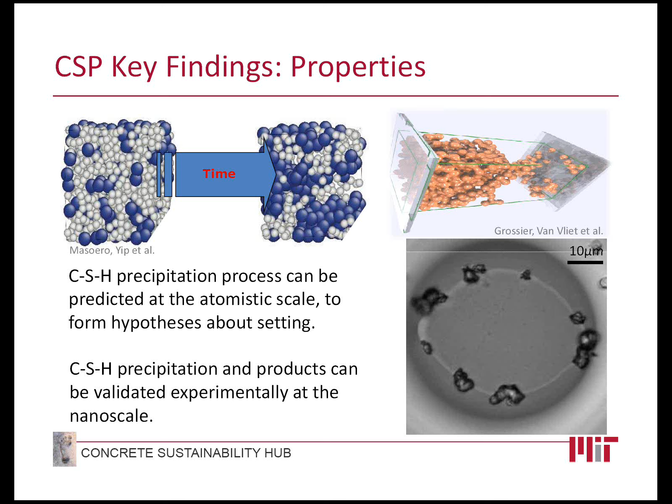Okay, so that's the science, and you've heard that. I just wanted to recap the highlights rather than bring you out of the details, but there's also quite a focus that we have in the Hub on society. So if we move to the next slide, I'll highlight one of the important roles that the Hub serves, besides just doing research, which you also do within your industries, is to really educate and create.

No, go back please, there might be a little time lag between what you're doing and what I can see. Okay, so we're creating the next generation of researchers, which you may choose to hire into your companies, who may choose to stay in academia, but they'll be moving this forward.

And there's really an amazing array of researchers at the undergraduate, graduate, and postdoctoral level who are extremely eager to conduct this research. They see that it clearly identifies with their world, they resonate with the idea of sustainability. And once they're engaged in the research, whether it's on the LCA side or the CSP side, they find this a fascinating topic where they want to spend the majority of their research time.

And we consider that not surprising because the faculty members also find this a rich and interesting research area, but very gratifying because this is a mature material. We are competing for these top students and postdocs with faculty who are studying the next drug to cure cancer or the next solar cell design. So the fact that there's a large number of people streaming into MIT to work on this problem, I think bodes very well for the future of the industry.

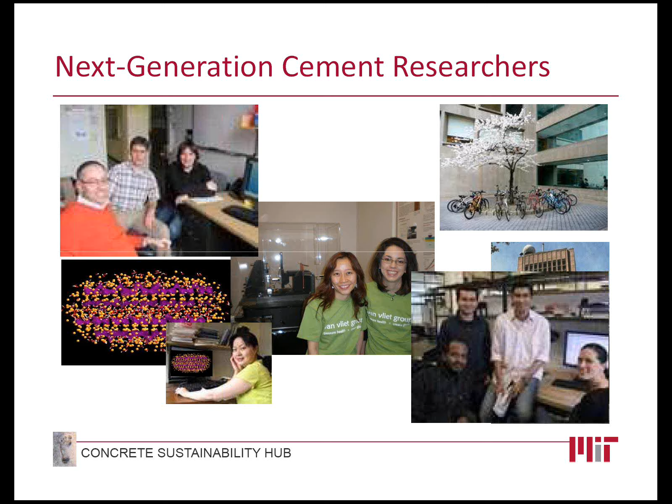Okay, next slide. We also within the Hub do quite a bit of outreach, and here's just a few examples of that where our graduate students are conducting demos for the wider community that are being published in local papers.

MIT celebrated its 150th anniversary this past spring, and we had several activities for the Massachusetts community who came out in terms of learning what the scientific issues and challenges are, what the environmental opportunities are, and even how to make cement, so they actually understand more what it is as a material, what it means to make cement paste and concrete.

And then we also do quite a bit of outreach and interaction with the government. So for example, this is a photograph of me in the black and Senator Kay Bailey Hutchinson of Texas in red, where we visit and share our perspective, not as advocates of the cement and concrete industries, but as advocates of using science to make public policy decisions, and what we're doing within the Hub to advance that way of thinking.

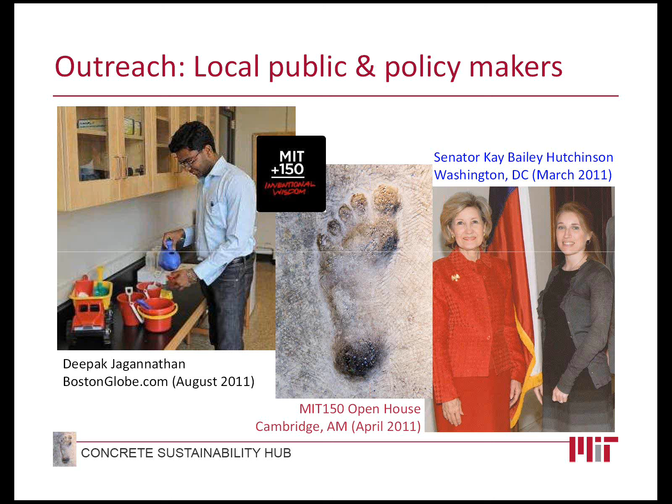Okay, and then finally just pointing forward towards solutions. So with the science and with these societal opportunities in hand, where do we go from here in the next 20 years?

So this challenge that we set for ourselves, to figure out where we'd like to plot our trajectory up to 2030, we can really think about in a few different areas. And again, we bring back this graph of greener structures and greener materials to guide our thinking. But our goal is to move to new materials and to new structures by using the platforms and the methods that you've seen discussed today.

So we're interested in identifying ways that will truly change the properties of cement, paste, and concrete. We're also interested in identifying, in partnership with you, the structures that are taking best advantage of the properties that the current materials have and the new materials will have in spades. And then how will these changes impact the environment and the economy?

We're in a unique position to think about this in ways that might be different from industry because the perspective is different, but also to articulate that and influence the education that brings the next generations of researchers and policy decision makers along the way with us, in terms of how to connect science and engineering to architecture and also to policy.

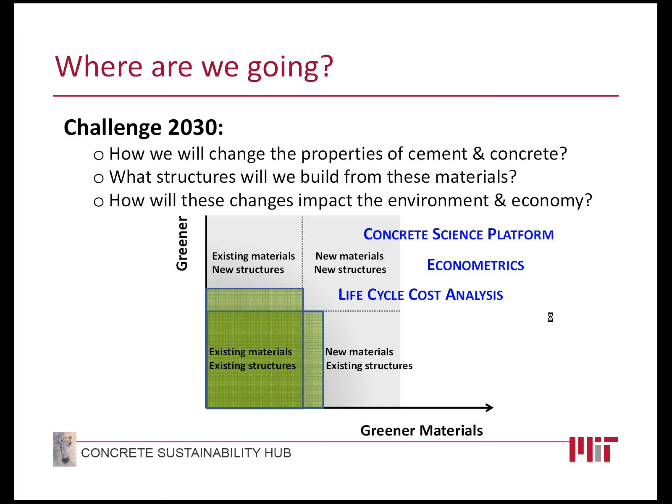So in terms of the new materials, Roland touched on this a bit, but I'll emphasize it here. We are really identifying the ways to scientifically, with predictive capabilities, introduce new substitutional elements within, for example, the calcium silicate hydrate phase itself. So you can add filler, you can add fly ash, for example, but you can also think about how can I change the final composition of the CSH, engineer ways to do that. And then what will that do to the stiffness, the strength, the creep, the shrinkage of cement paste, of the final concrete.

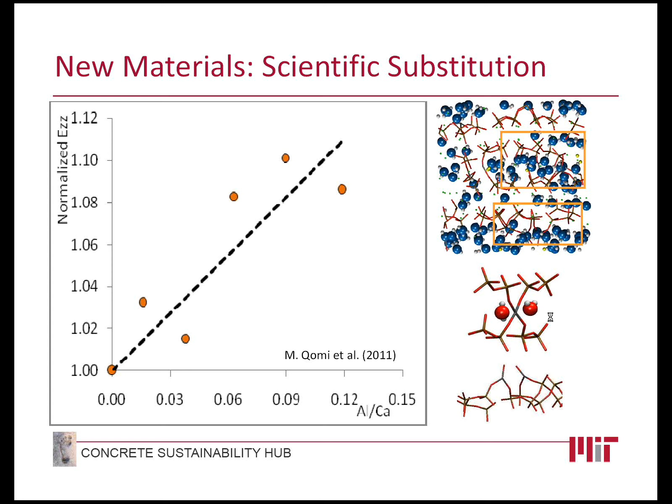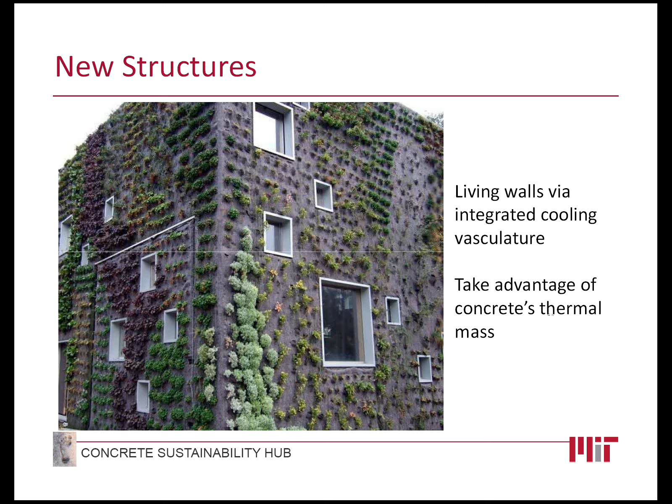We're also interested not just in new materials, but new structures. Two areas we're actively engaged in discussion about, and also work within the hub, involve changing the building design itself. For example, introducing a vasculature, just like we have in our bodies, but within a building, to have cooling that takes advantage of the thermal properties of cement and concrete in their best possible light. This involves intense discussion and coordination with people who set building codes, with architects who design buildings, and with the other materials that are integrated into roadways and residential structures. By changing the design to make best use of existing and future new materials, we think this is the wave of the future for introducing sustainability into infrastructure.

So in summary, what we've accomplished in the past few years has focused on current structures and current materials. There, LCA has played a key role in identifying opportunities moving forward that can change the equation, that can bring down the global warming potential of our roadways. We've also started to identify ways to change structures using current materials, for example using the thermal properties of concrete, such as thermal mass, to the best possible advantage, depending on which parts of the building.

We're moving towards identifying ways to use new materials within current structures, and you see that in the context of pavement and pavement-vehicle interaction, so that we can impact the fuel consumption of cars driving on our current roadways by bringing in new materials and new material processing that will, for example, increase the stiffness of the final concrete structure.

Finally, moving forward, we'll always be identifying the best pairing of new structures and new materials, really having the structural demands guide the materials development at the scientific level, as well as the new material capabilities inform better, smarter, and heretofore impossible design of structures. So the Concrete Science Platform is really providing the potential to bring down the carbon dioxide burden and even introduce new functionality into cement and concrete products, but we need to do that in the context of always keeping an eye on the life cycle and life cycle cost analysis.

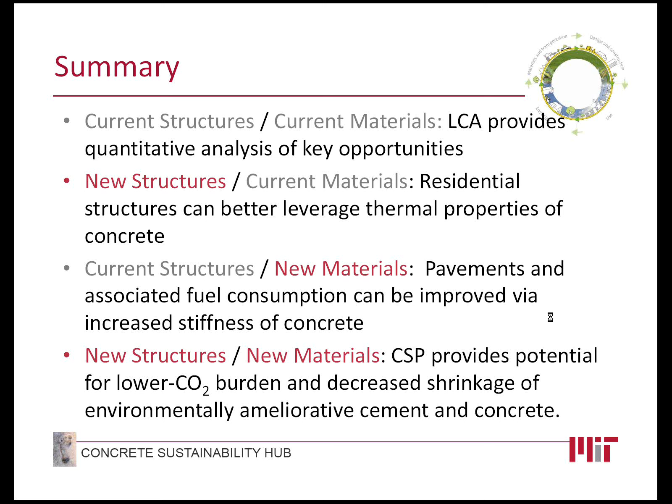Our challenge is really to realize sustainability, and we're going to do that by first impacting the science. Moving forward, we're increasingly focused on integrating what we're doing on the life cycle cost analysis side and what we're doing on the Concrete Science Platform side, getting that back and forth going, because our tools are in place, our methods are there, our team is now very competent in understanding the science and how to interface with the various industries. So we need to get the results talking back and forth to each other and enabling new solutions. On the societal front, we're training the next generation of engineers.

We are, to the extent that we can, influencing the ability of policymakers to understand the science and technology that we and the industry are developing. On the solution side, the closer we partner with you to develop new materials, new applications, new structures, and even the motivation and scientific underpinning for new policies, that's where we'll be successful. So for us, success 20 years out will be a new generation of researchers and policymakers that say, of course we would consider using cement and concrete for the right parts of the right buildings, because our goal is sustainable infrastructure. Of course we would think about changing our water distribution methods or our electricity grid to use these materials in their best light. That's what we'd like to see moving forward, and that starts with increasing interactions with folks like you.